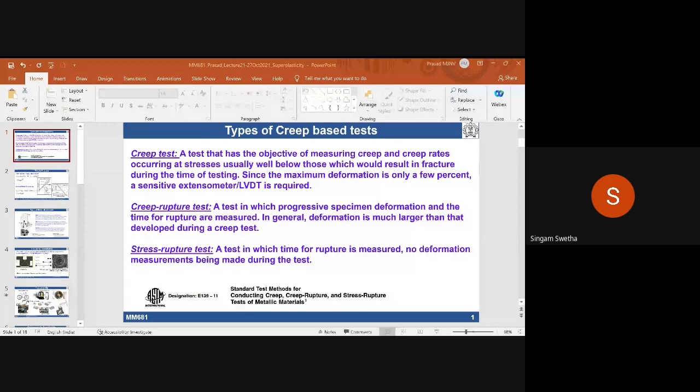Sir, and the term paper report submission, is that date also going to change? No, no, that is fixed. I said presentations are 30th onwards, but these dates are fixed, already on Moodle everything has been set, the time has been set. Is that okay? If any other things are there, let me know.

So let me start. Today's presentation, basically my lecture slides. I hope all of you are able to see my lecture slide. So in my previous lecture, we had a discussion about creep deformation.

We spent ample time to understand what our understanding is related to creep deformation. Creep deformation is a high temperature deformation phenomenon, usually considered under constant load or stress, and we're talking about only plastic deformation. In metals, creep is basically related to plastic deformation, time dependent plastic deformation.

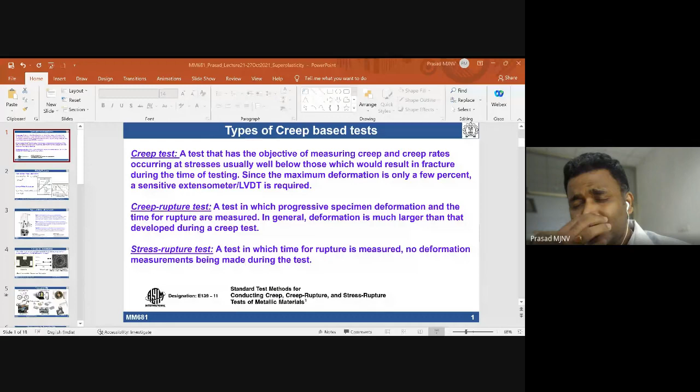In polymers, we also talk about creep, but there we talk about viscous flow behavior, viscoplasticity, viscoelasticity. Those things also come under creep deformations.

Apart from regular creep test, we also have a creep rupture test and stress rupture test. Under creep rupture test, if I want to know the time dependent plastic deformation and how much time is required to rupture the whole material, one can use a Larson Miller parameter, which takes into account the temperature and time to rupture combination. From that I can determine what is the stress requirement for a given Larson Miller parameter, below which the material will be safe, and above which it will be unsafe, at elevated temperatures.

This basically comes under the category of creep rupture. So then we had a discussion about residual stresses.

There are three different types of internal or residual stresses that can be present in a material: type 1, type 2, and type 3. Type 1 basically comes under the category of macro stresses, while type 2 and type 3 come under the category of micro stresses. The length scale varies, and according to length scale, people have categorized residual stresses into these three types.

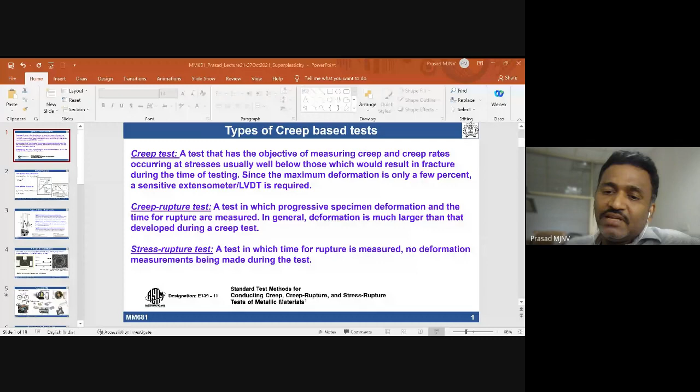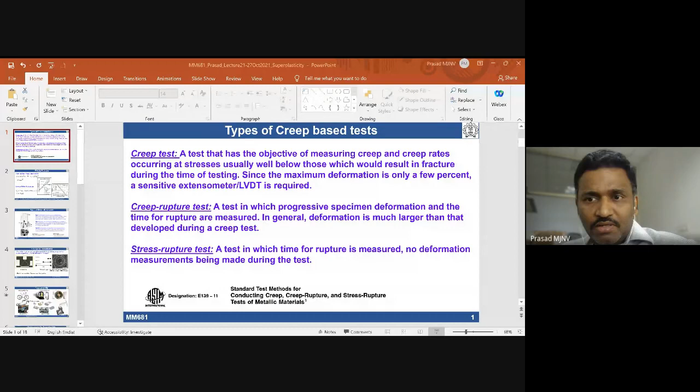Sir, are you changing the slides? No, I think it's on slide number 3. Am I right? Because it is not changing. But it was on the first slide only, sir. It was not, just a minute I think. Just now it changed, one minute. No, I did a mistake, some mistake. Okay just wait, I'm sorry, thank you so much for that, I did a small mistake, okay.

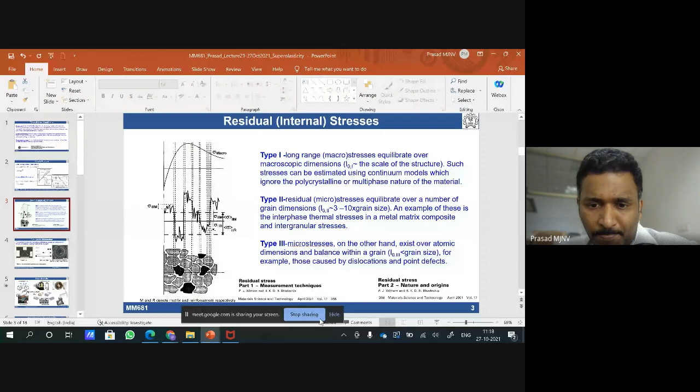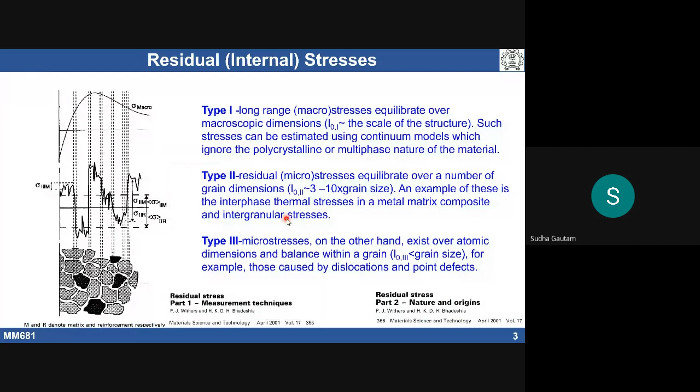Are you able to see it now? Okay, slide number 3, okay. Yes sir, it is visible. So basically, what, no sir, actually I'm not able to see. Just a minute, I think it will take time for you. Okay just see, okay sir. No just see that it will be okay, it usually takes time depending on network connection.

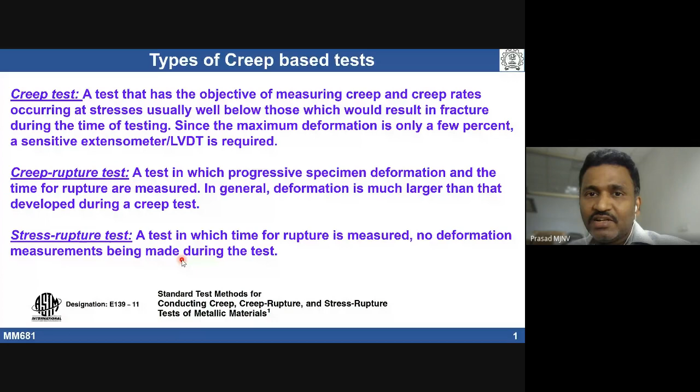Are you able to see now? See slide 1 now. We had a discussion on the creep deformation behavior of materials, and then on creep rupture behavior of material. Larson Miller parameter is the important parameter which describes the time dependent temperature compensation parameter. By taking time and temperature, one gets a Larson Miller parameter. For a given Larson Miller parameter, we determine what stress can be applied to the material so that it can be safe. So for design purposes, people use the Larson Miller parameter to understand the effect of time and temperature on creep rupture or creep deformation of a material.

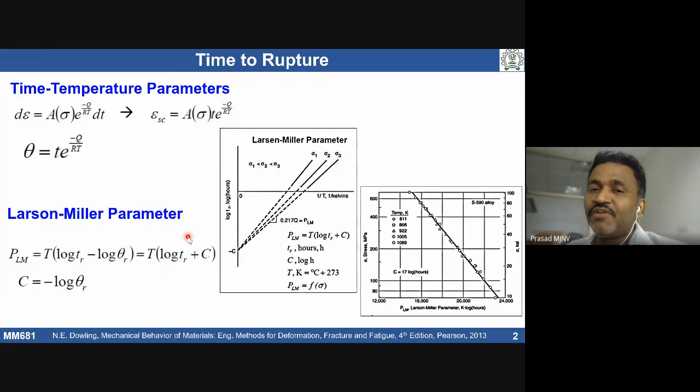Then we had a discussion of residual stresses. There are three different types of stresses that can be present in a material as residual stresses. Depending on length scale: at small length scales we talk about micro stresses, and at large length scales we talk about macro stresses. Within micro stresses we see two different types, type 2 and type 3, with type 2 occurring at a slightly intermediate length scale. This is all about residual stresses and creep deformation from my previous lecture.

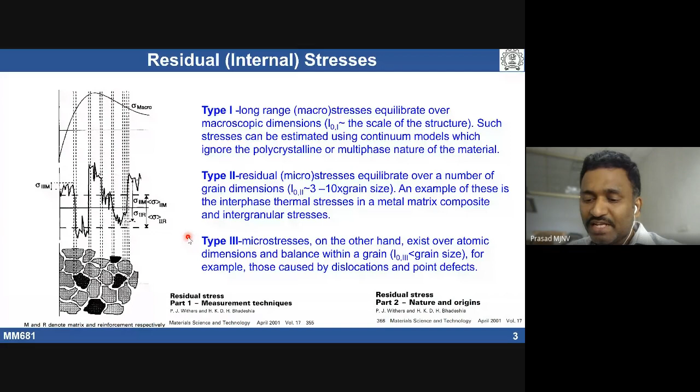So today's discussion is related to the next component, which is superplastic deformation. This phenomenon is simply called superplasticity.

Superplasticity - so when do you say a material is exhibiting superplasticity? It is basically called when certain materials, typically polycrystalline materials, exhibit very large uniform elongations, typically greater than 400%. So certain class of materials typically exhibit very large uniform elongations. If the uniform elongation is greater than 400%, we call it a superplasticity phenomenon.

This phenomenon was first scientifically reported in the year 1934, given by Pearson. He had taken a specimen made of bismuth and tin alloy, and when it was deformed under tension at elevated temperature, it exhibited very large elongation to failure - the specimen still had not failed. In order to take a photograph, he spiraled the specimen after deformation. So with respect to the original gauge length, he determined the percentage of elongation the specimen had experienced - about 1950%. This was the first scientific report on the superplasticity phenomenon.

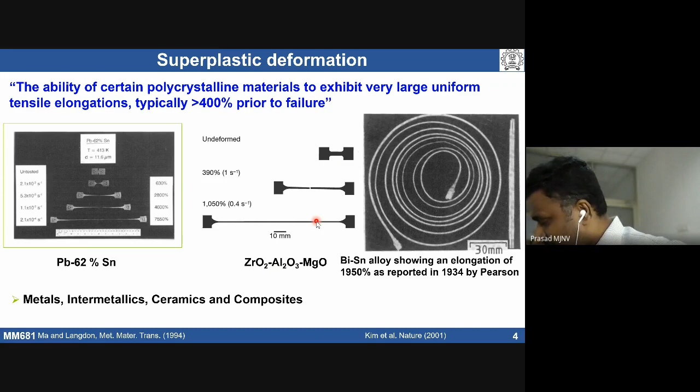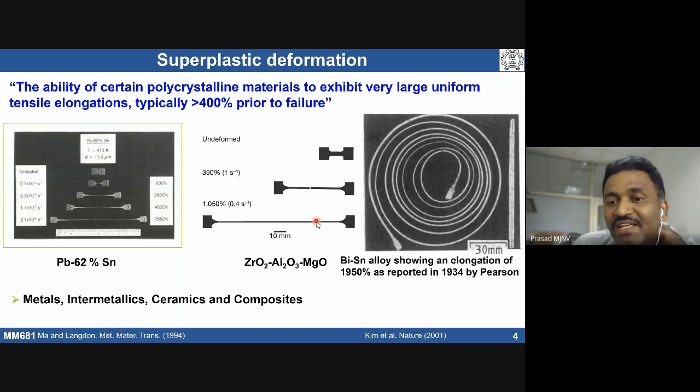What is the other advantage of having a superplastic phenomenon? Forming is easy - we can deform materials and form components, various complex components very easily. For example, some applications where superplasticity has been used for making a single shaped component, like a bicycle frame - a single component made by superplastic forming.

Some luxury cars which use aluminum alloys - the whole body can be formed very easily by a material exhibiting superplasticity. Even some luxury car doors use non-ferrous alloys formed using the phenomenon of superplasticity. Nowadays we also see wide chord fan blades and turbine blades made of titanium alloys, having a truss core structure, which basically uses diffusion bonding combined with superplastic forming. So complex shapes can be obtained from a material which exhibits superplasticity, with minimum load requirement - with very low load we can deform the material, the tooling requirement is very small, and the forming will be very easy. So that is where superplastic phenomena is used.

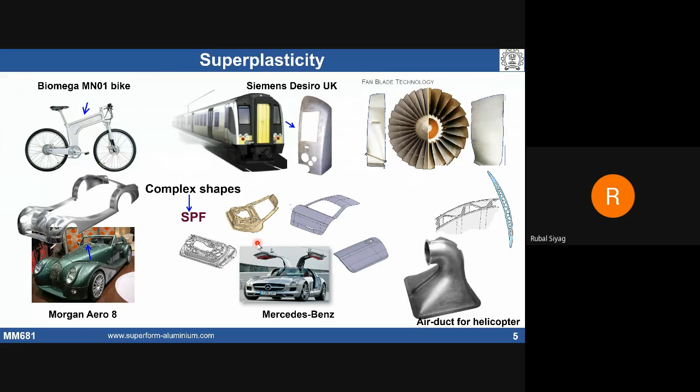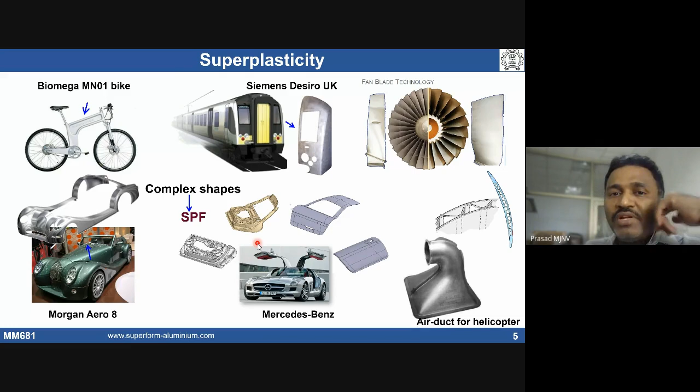So what are the requirements for a material to exhibit superplasticity? Fine grains, low strain rate, high temperature, and it should be free from cavities or defects - you've listed almost all of them. Basically superplasticity is considered an elevated temperature behavior, an elevated temperature phenomenon, a high temperature phenomenon. So if we have high temperature, diffusional activities are going to be higher.

So if you have a good amount of diffusion, mass transport will be very easy, and you can obtain very good large elongations. That's one requirement: high temperature.

The second one, the most important one, is a relatively stable fine grain size. That is the second requirement.

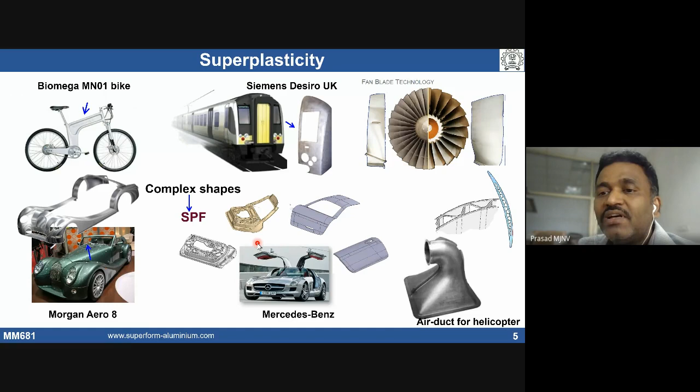The third one is high strain rate sensitivity. The material should exhibit high strain rate sensitivity. The fourth one is resistance to cavitation. These are the four important requirements for a material to exhibit superplasticity.

These elevated testing temperatures are typically greater than 0.5 times the melting point. For stable fine grain size, for metallic materials, the grain size should be less than 10 micrometers. For ceramics, the grain size must be less than 1 micrometer.

The material should exhibit high strain rate sensitivity. The M value should be as high as possible. Higher the strain rate sensitivity, we are going to see viscous flow, Newtonian viscous flow, close to viscous flow. M equal to 1 means the stress exponent is equal to 1, which means we can have a viscous flow.

So that means resistance to flow localization. M basically has a physical significance: resistance to flow localization is going to increase if you have a material with high strain rate sensitivity. These are interrelated.

Finer the grain size, we can see higher strain rate sensitivity. The strain rate sensitivity is going to be higher at elevated temperature in fine grain materials.

At the same time, the material should have good resistance to cavitation. This is internal - when you deform material at high temperatures, polycrystalline materials undergo cavitation. We should have increased resistance to cavitation. So these four parameters are all interrelated.

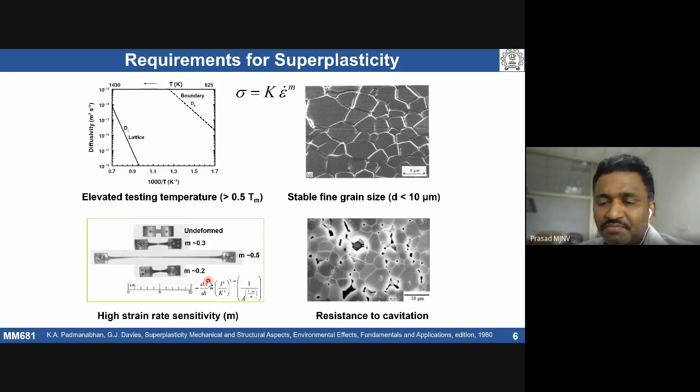See, high temperature behavior - we talk about high temperature behavior at high homologous temperatures greater than 0.4, 0.5 times the melting point. We use this kind of constitutive equation, which is almost similar to what we see in creep deformation. The strain rate, steady state creep - this is the Bird-Mukherjee-Dorn equation.

This equation basically tells strain rate is going to depend on stress, grain size, and temperature. There are constitutive parameters: 1 by m is nothing but n, the stress exponent. M is the strain rate sensitivity, p is the inverse grain size exponent, q is the activation energy.

This is a high temperature phenomenon at low stresses. At low stresses, if that material is deforming, typically we use this kind of constitutive equation.

According to this equation, if we refine the grain size, what are the beneficial things we can see? If we refine the grain size, for high strain rate what can one expect? Finer the grain size, higher the strain rate. That's one thing. Anything else?

Because I'm only refining grain size, at a particular strain rate, if you deform material, your stress requirement is going to increase or decrease with the refining grain size?

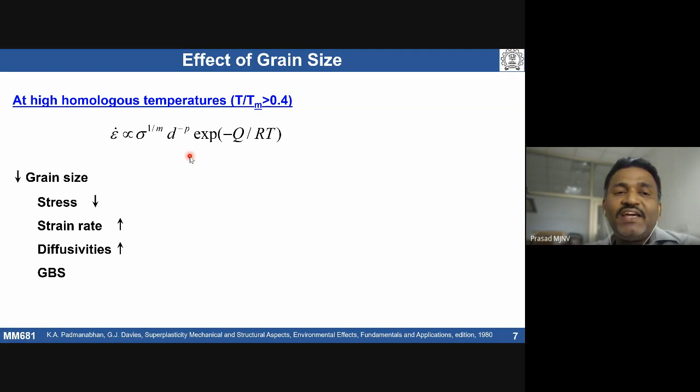However, one of the major issues if you refine a grain size - can anybody say what could be the major problem if you refine the grain size? The strength at the higher temperature will be less, sir. Strength at the higher temperature side - yeah, that's what, the stress is going to come down. Okay, anything else?

So there will be chances of formation of cavities in the grain boundaries. Okay, but actually, at high temperature, fine grain size might not give you easy cavities. That's what superplasticity basically is - when you say superplasticity, resistance to cavities is going to be higher in those materials.

Sir, grain boundary sliding could occur if there are more grain boundaries. That's good, that's a good point, no? Because for superplasticity to occur, more grain boundary sliding is good for it - more deformation can be induced.

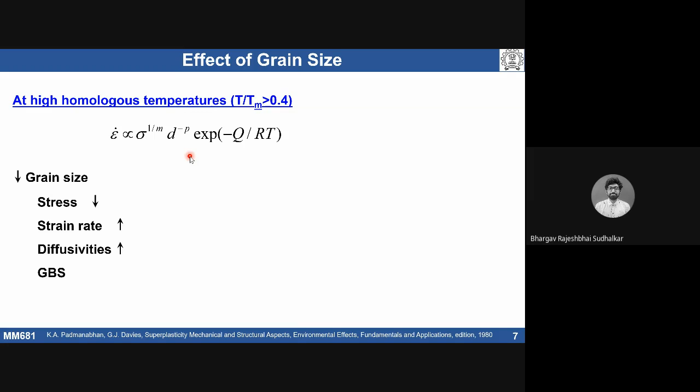If I give you pure metal - one is 100 micron, other one is 1 micrometer - same metal, copper. If I heat it to high temperature, what happens? Grain growth occurs. Fine grain material can undergo easy grain growth.

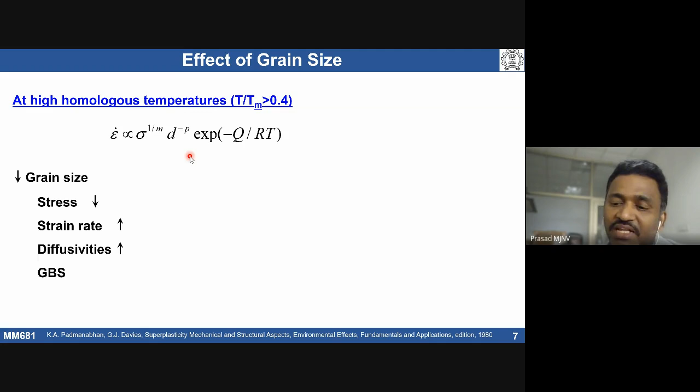Grain growth - thermal stability is one of the major issues. If you go for finer and finer grain size, thermal stability is one of the major concerns. Because the driving force for grain growth is inversely proportional to curvature, and curvature we basically talk about in terms of grain size. So pure metals, even if you have a fine grain size, the moment you take it to elevated temperatures, it's going to undergo grain growth. Then all your beneficial effects are going to be lost.

That's why we do not see superplasticity in pure metals. Superplasticity can be observed only when there is a stable grain structure. That's why we need a fine, stable grain size, which can be obtained in case of two-phase structures and quasi-single phase materials with particles, like precipitates. Those alloys which contain precipitates can only exhibit superplasticity, because we need to control the grain growth - you have to pin it down. So two-phase materials and quasi-single phase materials containing precipitates can exhibit the superplasticity phenomenon. Is it clear?

Sir, could you please explain the relation between D and sigma again? Just now, that if part - you maintain constant strain rate and constant temperature, all constant. Now only you have sigma. If you send d to the power of minus p to the other side, sigma to the power 1/m is proportional to d to the power of p. Maintain all other constants except sigma and d. What happens? Sigma is basically proportional to d to the power of mp. Am I right?

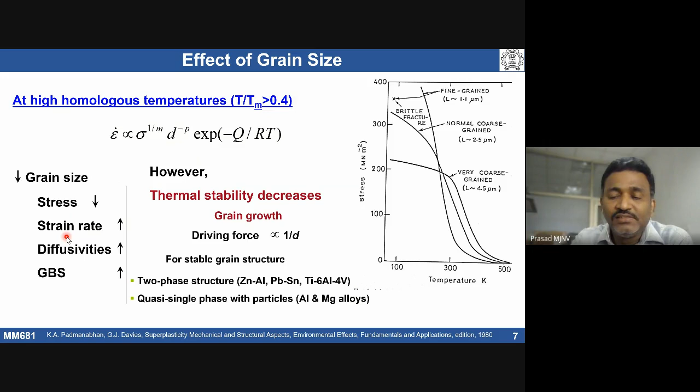Okay, effect of strain rate sensitivity. So we said one of the requirements is the strain rate sensitivity M value should be as high as possible. Higher the M value, we can go towards a viscous flow, easy flow. So M, we know that if I take stress at room temperature, typically M will be very small.

So where do we take the power law equation between strain and the stress? Stress is basically epsilon to the power of n. N is the strain hardening exponent. But once you go to high temperatures, your strain hardening exponent is going to be almost zero, and we'll have the strain rate power law equation. So there, M is going to dominate over N at high temperatures.

So people usually represent sigma to take into account strain and strain rate at a fixed temperature. At a fixed temperature, people usually represent sigma as proportional to strain and strain rate: strain to the power of N, strain rate to the power of M.

So if I take only this equation and convert it into rate form, for example sigma can be written as P by A, load by area. If I take that and see what is the change in area with time, and derivate it, I will get this kind of expression using the initial power law expression.

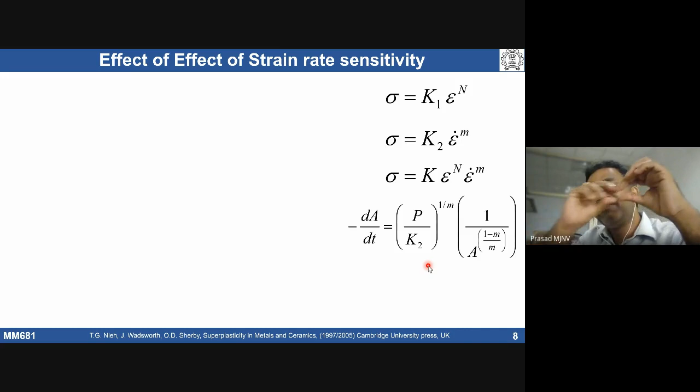This is because m is equal to 1, above the glass transition temperature. If you deform a glass, if you pull the glass, it can flow like anything. You can get a very thin wire. If you take a thick rod, we can make a very thin wire out of it, or a fiber, glass fiber, because m is equal to 1.

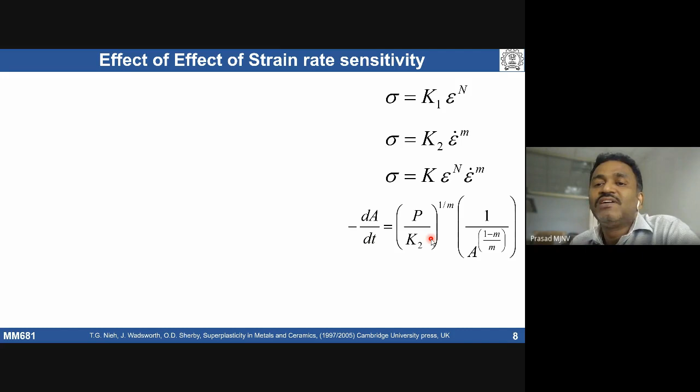They're actually independent of area. The rate of change is a constant. So the higher the m value, the rate of area change, that means reduction, how much the cross sectional area is changing with time, is going to be constant. That means there is no necking if m is equal to 1.

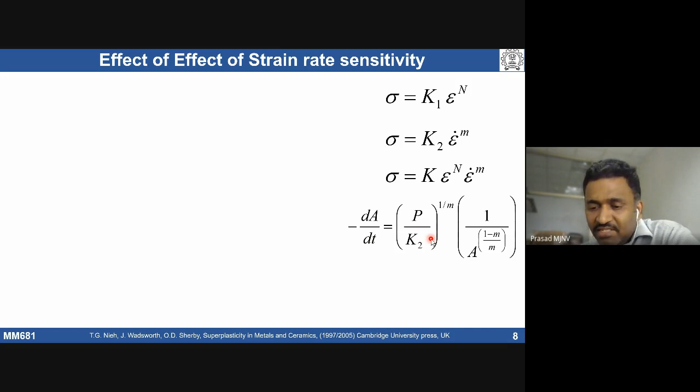So the higher the m value, we can get a uniform elongation. The rate of uniform elongation is going to increase with increasing m value. So that's why people have observed, by taking various materials and combining the data, how the m value and ductility, tensile ductility, elongation to failure, delta L by L naught, varies.

Is it clear? Any doubts here? Yes.

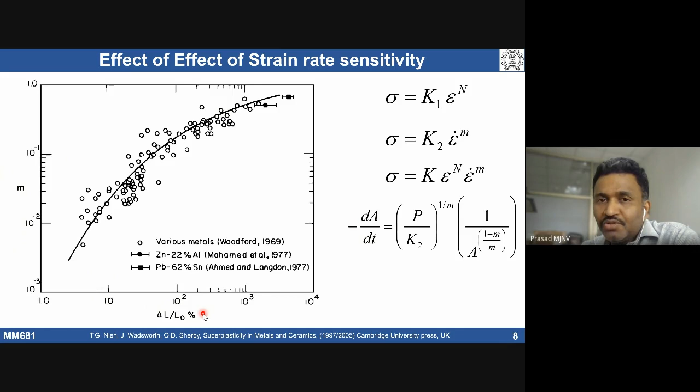So when we talk about superplasticity, it has some characteristic features. For example, if I deform a material using tensile loading conditions, we'll get a stress strain curve at different temperatures and different strain rates.

Now fix the strain and temperature. And if you see how stress is going to vary as a function of strain rate, at a fixed strain, typically 20, 30, 100%, whatever, we fix the strain and temperature. So typically the stress is going to vary as a function of strain rate in a sigmoidal shape.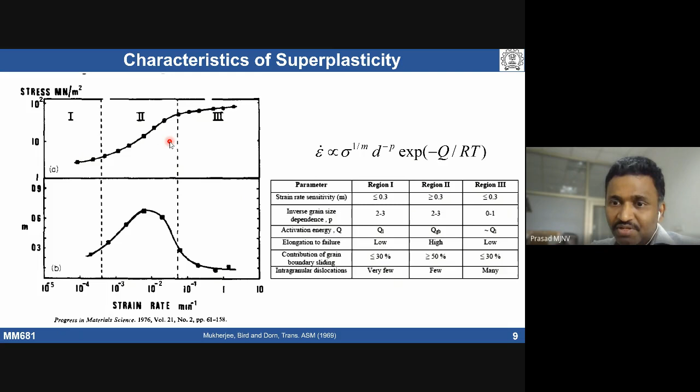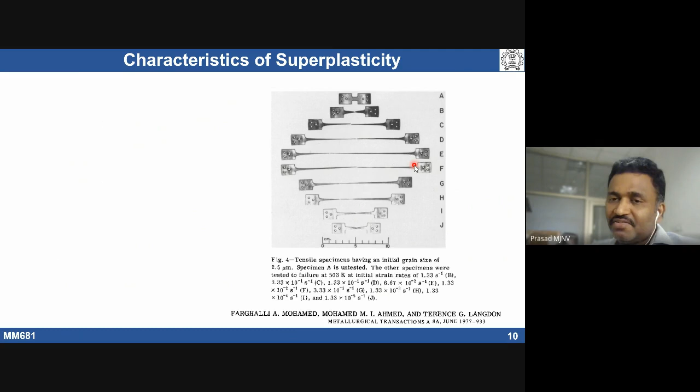If I take material as a zinc aluminum alloy, when it was deformed at different strain rates, at a particular strain rate the material is going to see maximum tensile ductility. So one can establish this kind of curve, stress versus strain rate, and we get a sigmoidal shape.

And if you take a ductility measure, measuring ductility as a function of strain rate, we get a bell shape. The purpose of showing this slide is basically, at a fixed grain size, if you deform material at three different temperatures, what is the effect of temperature on the shape of the superplastic curves - in terms of sigma versus strain rate and ductility versus strain rate.

So with increasing temperature, we do see the strain rate is shifting towards right, because diffusion activity is going to be more. So you can deform it even at high strain rates and large elongations can be obtained. Within this temperature window, with increasing temperature, the rate of deformation can be improved and large elongation can be obtained when you deform at elevated, higher temperatures.

Similarly, for the same grain size, with increasing temperature, stress is going to come down, stress value is going to come down. So this is low temperature, intermediate temperature, high temperature - at a given strain rate, higher the temperature, lower the stress.

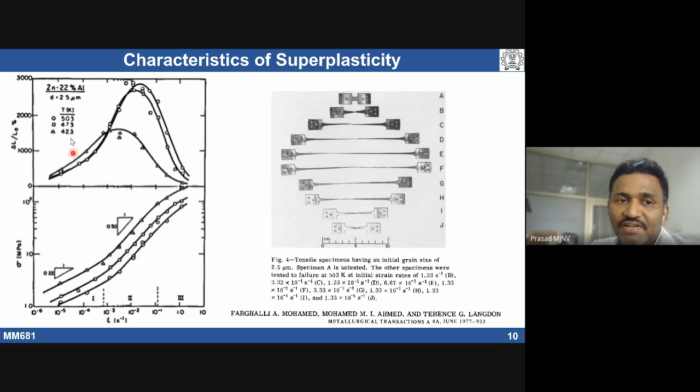So, as I said, several mechanisms occur when you deform a material at high elevated temperature, at any temperature. At high temperature, if you deform material, the dominant mechanism for a material to exhibit superplasticity is grain boundary sliding. For example, take a kind of material bicrystal, assume that I have a bicrystal with a boundary.

Now you put a scratch, some kind of very minute micro scratch placed here. If there is grain boundary sliding, what is the meaning of grain boundary sliding? Basically, when you deform the material plastically, the shear component acts on the grains across the boundary, and we see this kind of movement. The grains can actually slide each other.

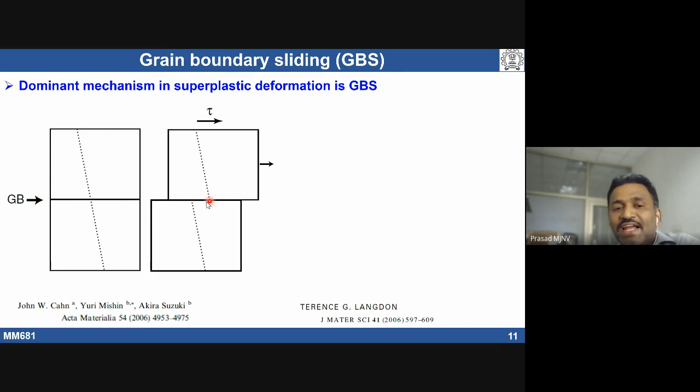So initially I have a key like this marker. If you deform the material, assuming there is grain boundary sliding, we see the marker shift a certain width. There's some change in this. This change in the sliding width, with respect to the original grain size, is taken as the grain boundary strain, the grain boundary sliding strain.

So if we take a three-dimensional view of a grain structure, with a simple assumption, the contribution of grain boundary sliding strain to the total strain is represented as xi. Grain boundary sliding strain is basically calculated by taking the average change.

For example, assume you have multiple grains in a polycrystal, so many grains with so many boundaries. We know which boundaries contributed to the grain boundary sliding, and we can know the change in sliding width. That average sliding width with respect to average grain size is taken as the strain due to grain boundary sliding. So in region 2 of superplastic deformation, the xi value is

going to be greater than 50%, greater than 50%. That means if, for example, there is 1000% elongation that the material has experienced, we can see more than 500% strain is coming from grain boundary sliding activity.

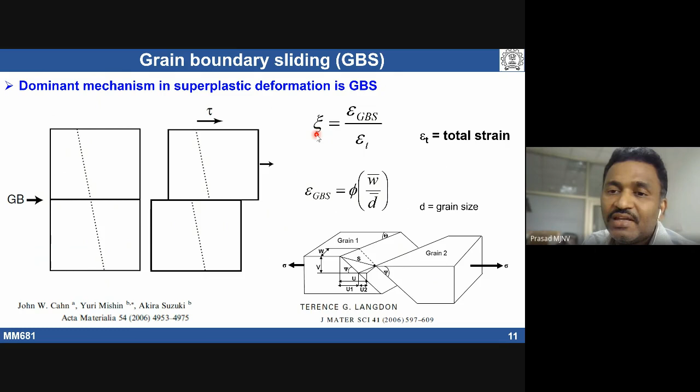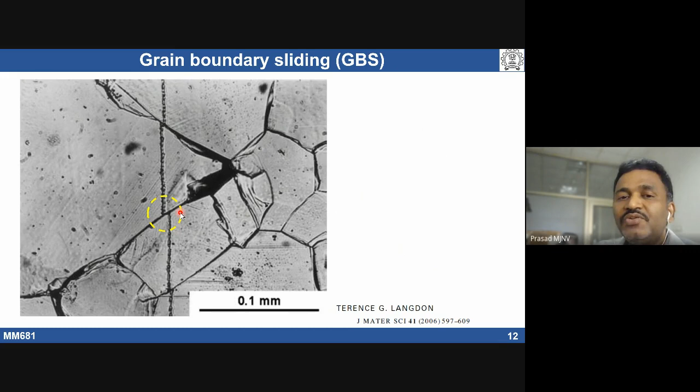So, as I said, for polycrystalline materials, typically what people do experimentally is, before deformation, put a scratch mark, a very micro scratch will be placed, and after deformation, see how much width change has taken place. So calculate the average width change, and we know the average grain size of the material, so that can give you the amount of grain boundary sliding that has taken place in the material. This is the experimental way of estimating grain boundary sliding strain during plastic deformation of a material at elevated temperatures.

So there are actually two different types of grain boundary sliding, two different types of grain boundary sliding activity mechanisms. If we take a polycrystalline material like this, during deformation, grain boundary sliding is taking place. Assume that grain boundary sliding is taking place. So this can become like this, or can also become like this with strain.

What is the difference between A to C and A to E? Any idea? In both cases, we have assumed there is grain boundary sliding, but there is a difference between A to C and A to E. What is the difference? Coarse and fine grain size? No, it's the same, I just started with the same grain size. In one case, we are seeing this kind of shape change, in the other case, we are not seeing a shape change of the grain.

So sir, in the second case grain boundary sliding is dominant, and in the first case, both cases the grains are deformed. In both cases grain boundary sliding is there, with the same amount of strain. In the deformed material, both cases show grain boundary sliding, but here we see a shape change associated with the grain. In the other case we don't see any shape change; the initial shape of the grain is more or less retained. We see elongated grains here, but not in the other case.

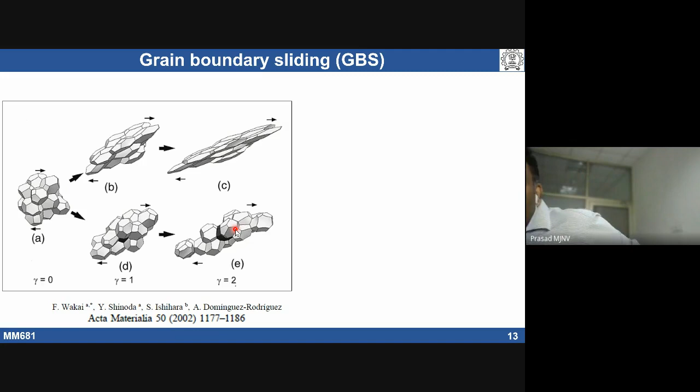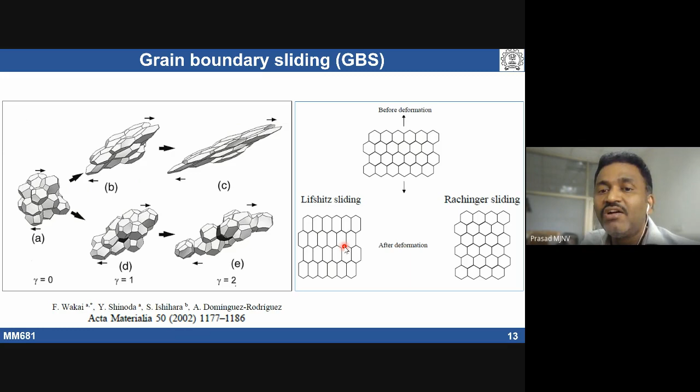So in both cases, at the end of superplastic deformation, if there is a shape change in the grain structure, that is called Lifshitz sliding. If there is no shape change but very large elongations, that mechanism is called Rachinger sliding. So if your initial grains are like this, and it shows elongated grains after undergoing sliding, that is Lifshitz sliding. If there is no shape change but the material has shown significant strain, that is called Rachinger sliding.

So both things can happen in materials, but it actually depends on what type of mechanism is basically accommodating the grain boundary sliding. Grain boundary sliding happens in both cases, but the accommodation mechanism, the type of accommodation mechanism, is going to be different in both cases.

When you go to high temperatures with a particular grain size, we may see dislocation creep and also diffusion creep, apart from grain boundary sliding. If diffusion creep accommodates your grain boundary sliding, that is called Lifshitz sliding. If dislocation creep mechanism is basically accommodating grain boundary sliding, that is called Rachinger sliding.

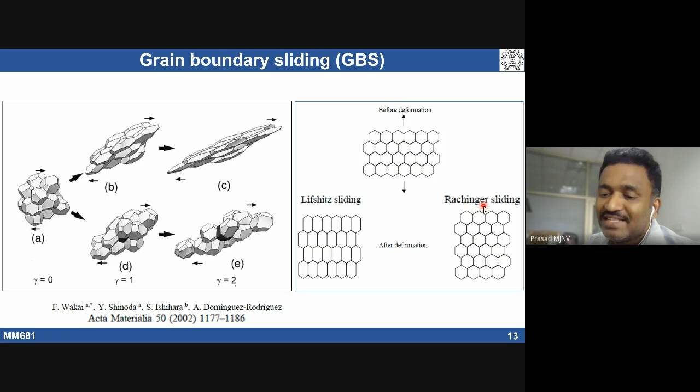For example, if you take grains like this, if there is diffusion creep and sliding, assume sliding has taken place. When sliding and diffusion have taken place, initially I have grains like this, a hexagonal kind of shape. There is diffusion creep because of mass transfer taking place, but it's going to leave some cavities. But if there is sliding activity, that basically avoids the cavitation.

Even if you take these grains in a hexagonal style, when there is grain boundary sliding, there is no shape change, but voids will be created. Those voids will not be seen easily in superplastic materials, because another accommodation mechanism is going to take care of the mass transport. In one case we see diffusion creep accommodation, in the other, dislocation creep accommodation. So when there is grain boundary sliding, apart from that, we may also see dislocation climb activity or diffusion creep activity, which basically minimizes the cavity formation in the material.

If this grain boundary sliding is accommodated by diffusion creep, that mechanism is called Lifshitz sliding. If grain boundary sliding is accommodated by dislocation creep, so that we have almost no cavity formation, that mechanism is called Rachinger sliding. So diffusion creep always leads to a shape change in the grain, while dislocation creep accommodation leads to almost negligible shape change of the grain during superplastic deformation. Is it clear about these two different types of grain boundary sliding activities we can see in materials?

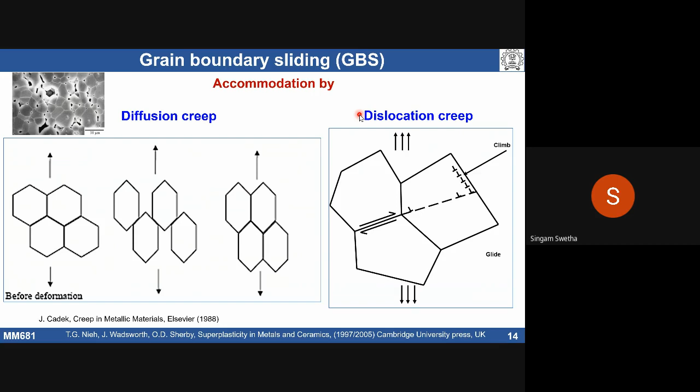Maybe it's because of diffusion at high temperature - we have the facility of diffusion. Once there is diffusion, your cavity formation is going to be controlled, because mass transport can take place very easily by diffusion.

So because of grain boundary sliding, there is a discontinuity going to happen in polycrystalline materials. It has to be accommodated; if it doesn't accommodate, it's going to lead to failure. So even 1 micrometer grain size has a large grain boundary area.

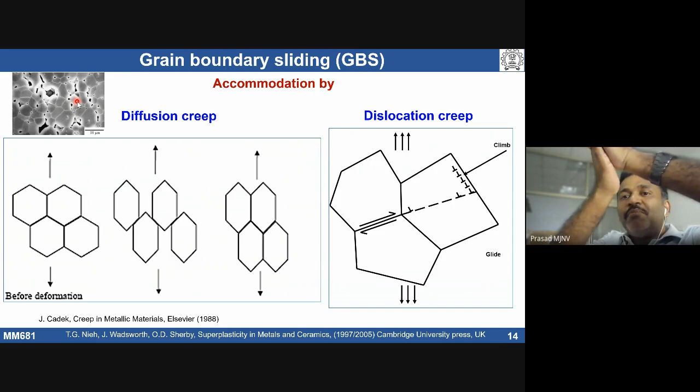What happened? The problem actually is at low temperature, diffusion is low, so whatever cavities or discontinuity has been developed by grain boundary sliding is not being accommodated at low temperature. At high temperature, it can be accommodated by diffusion or by dislocation because some kind of climbing can take place. At high temperature, you can see climbing activities because higher temperature makes climb easy, or cross slip can be very easy - those are high temperature phenomena.

So that's where your temperature effect comes into picture. Even if it's fine grain size, but at low or high temperature, that is the issue. So we do see low ductility regimes in steels. When you talk about deformed material at low or intermediate temperatures, grain boundary sliding is taking place, but there's no accommodation. That can lead to cracking, failure of the component.

Once you go to high temperatures, either you can see dislocation activities like climb and cross slip, or diffusion activities can take place. So one of them can accommodate your sliding activity. Accordingly, we do see shape change in the crystals, grain structure.

So before deformation, we have a grain size with aspect ratio 1. After plastic or superplastic deformation, if you look at grain structure, if the aspect ratio change is very small, that means the material has undergone Rachinger sliding. If there's a large aspect ratio developed, then we can say grain boundary sliding has taken place, contributing to large amounts of strain. At the same time, diffusion creep has taken place along with the grain boundary sliding.

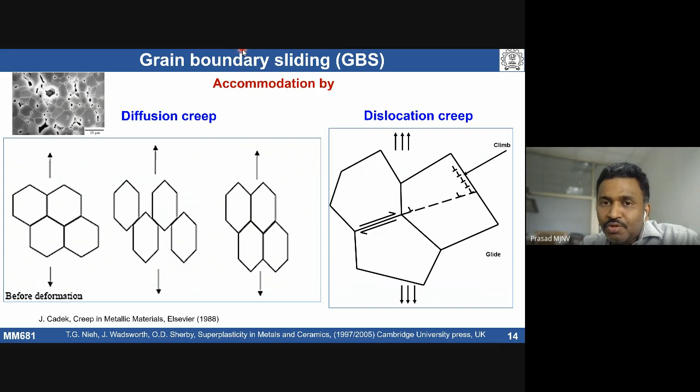So we know that subgrain structure is going to form when we deform material at high temperatures. The subgrain size is related to 20 G B by sigma, typical for metallic materials. G is the shear modulus, B is the Burgers vector, and sigma is the stress. So for a particular material deformed at a given temperature, I know what the subgrain size is going to be. At that temperature, if the grain size is less than or equal to lambda...

That type of constitutive equation used for describing grain boundary sliding is basically D gb by kT, where D is the grain boundary diffusion coefficient, diffusion along the grain boundary, and b by d square, grain size to the power square. Your p is equal to 2 and n is equal to 2, that means m is equal to 0.5, or n is equal to 2. So if the grain size of the material is less than or equal to subgrain size, we see this grain boundary sliding equation, the constitutive equation for grain boundary sliding is described like this. So for fine grain size we talk about grain boundary diffusion along the grain boundary, and the grain size dependency is going to be 2.

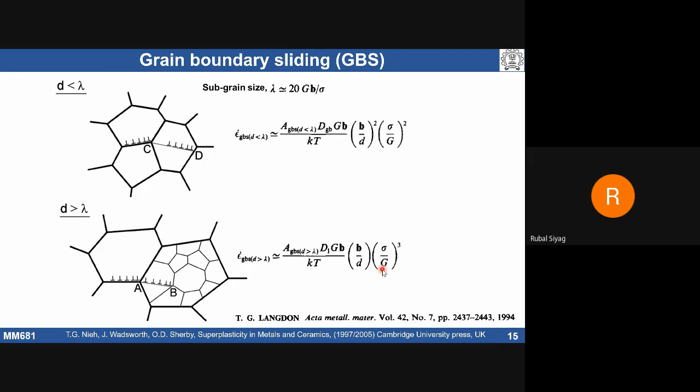What are the benefits of having coarse subgrain size than the grain size? When you talk about dislocations - subgrain means a dislocation cell structure has to form, then annihilation should take place. Annihilation of the dislocations leaves some subboundaries like this. So if the subgrain size itself is greater than your grain size, there's no chance of dislocation pile-up; dislocation is not going to retain within a grain - there's no chance of having dislocations within a grain. If the grain size is coarser, we are facilitating formation of subgrains.

Typically during hot deformation we do see subgrain structure develop. During superplastic deformation we do not see subgrain structure formation because of fine grain size. The moment subgrains form, which are of low angle boundary character, these subgrains have a low grain boundary sliding ability. Grain boundary sliding will be more only when there is a high angle character, with misorientation angle greater than 15 degrees - we see increased grain boundary sliding activity. When subgrains have a low angle character, there won't be any grain boundary sliding.

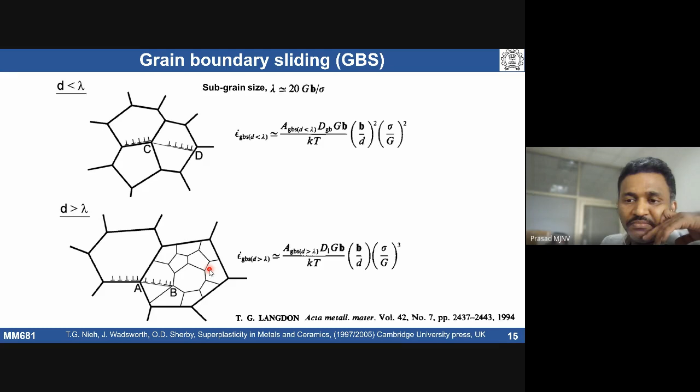Conventionally, in conventional superplastic materials, typically grain size will be 1 to 10 micrometers. These grain sizes can be obtained by thermomechanical treatment - some kind of rolling, annealing, forging type thermomechanical treatments can get grain size 1 to 10 micrometers. What people have observed under optimum superplastic conditions: M value typically 0.3 to 0.5 in conventional materials, and the temperature at which superplasticity has been observed in conventional materials is 0.6 to 0.9 times the melting point.

The strain rates are 10 power minus 4 to 10 power minus 3 per second. If you deform material at this rate, at this temperature window, which can exhibit strain rate sensitivity between 0.3 to 0.5, it can exhibit superplastic elongations. We already mentioned the record percent elongation observed in a lead-tin alloy at a temperature of 0.85 times the melting point - very high temperature, and the strain rate is very low. This behavior is observed at high temperatures when the grain size is between 1 to 10 micrometers, and the strain rate is also very low.

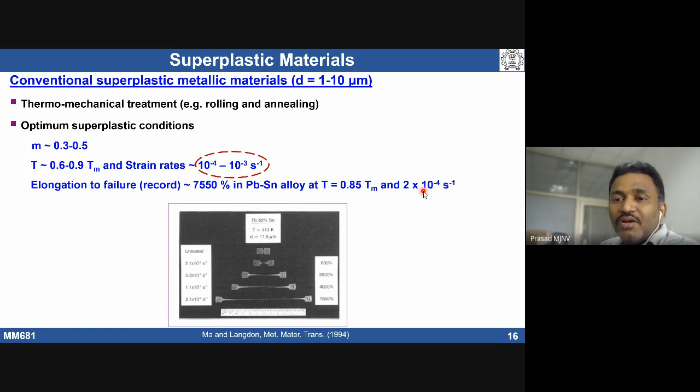If the strain rate is very low, what does it mean? Your production rate cannot produce a large amount of components. If I want to make a car body out of aluminum alloy, if I want large numbers of components, one has to deform material at a very fast rate. But at high strain rates, your M value is going to be low, cavitation can take place easily, and the dominant mechanism becomes dislocation creep rather than grain boundary sliding.

So such a low strain rate is one of the drawbacks of superplasticity. We need to have relatively high temperatures and low strain rates.

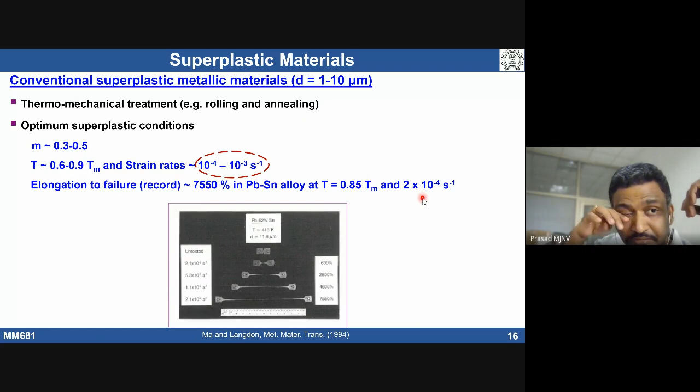So this is one of the major problems. And the other thing, record elongations have been observed in lead-tin alloy, which has no structural application. It's only used for soldering.

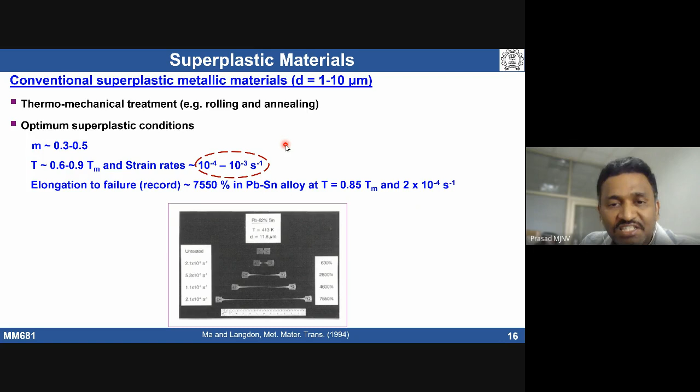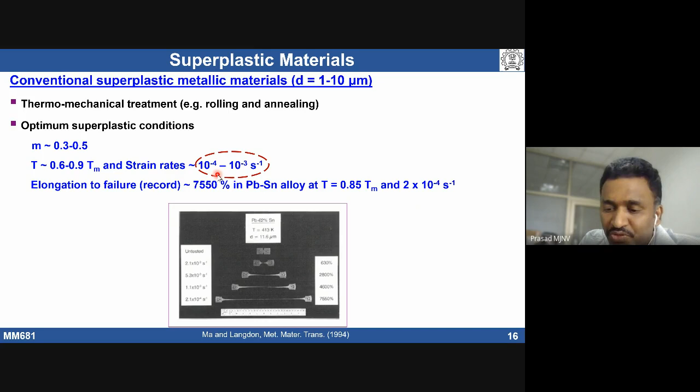At the same time, this grain size has to be stable, it has to be thermally stable. Otherwise it is going to grow rapidly - fine grain size can grow at a faster rate than coarse grain size. So one has to have a stable grain size, and it has to be much finer. Then only can I get high strain rate superplasticity.

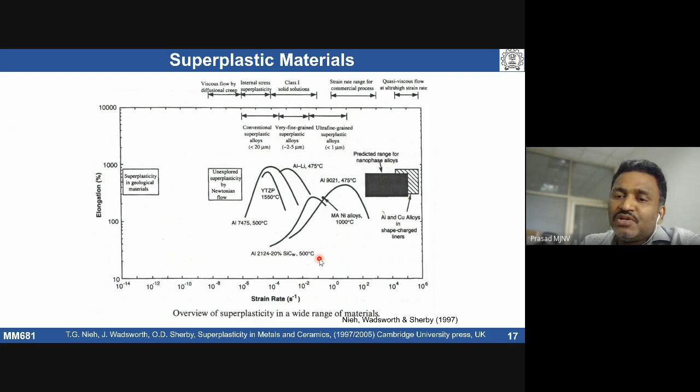So that means if you can have a fine grain size, and make the grain size stable at that temperature, we can get superplasticity with large superplastic elongations at high strain rate, even at low temperatures, because diffusion activity increases if you have a finer grain size. So one can also lower the deformation temperature. These come under the category of advanced superplastic metallic materials. There's a lot of work going on now to get stable fine grain size materials so that we can deform material to large elongations at high strain rates.

So I'll stop here. This is the whole thing about superplasticity. If there are any doubts, please let me know.

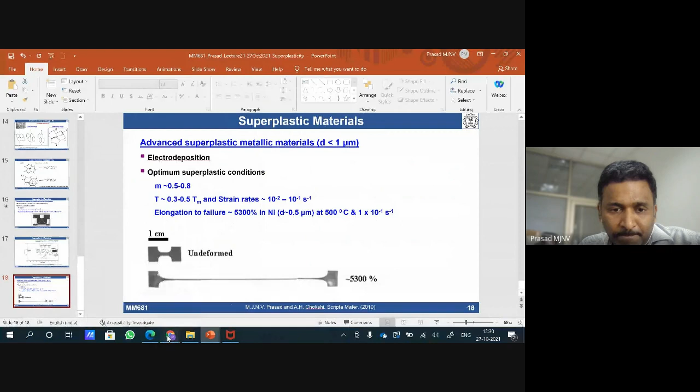Hello. Yes. So we don't need to submit the PPT before the 29th, right?